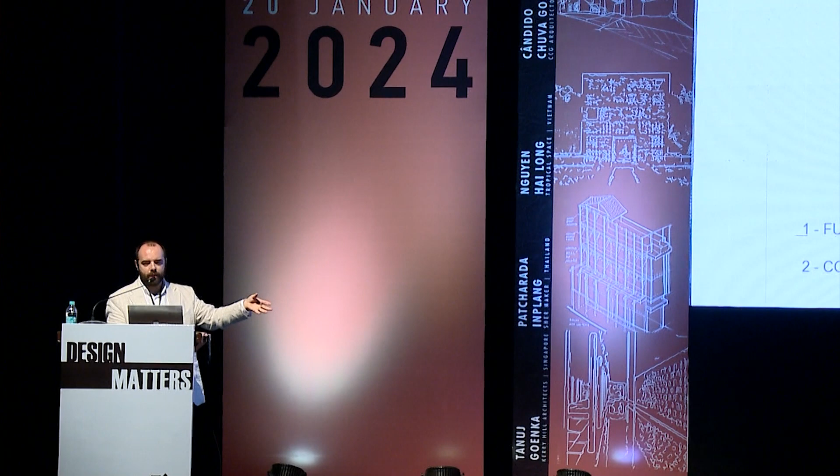Then we have two other aspects, the lighting concepts and the artists, because we think that architecture obviously is going to transform and create spaces for new functions and new people to inhabit them. But we have to gather other artists and other areas of expertise into our practice in order to enhance the potential of our projects.

In this specific work that we developed over the last 40 years, we have a team of lighting designers that work with us, and we have a lot of visual artists, from sculptors to painters, that also work with us. Basically, when we have a project, from the beginning, we also try to find and to understand how we can bring these people with us to explore the projects with us.

So I will now pass to show you some projects. Basically, I will divide this presentation in 4 sections. In each section I will show you basically two types of projects. I will try to be brief on the explanations, but it's important that we divide in these 4 sectors, because they remain basically the 4 major important issues that we have in our practice.

The first sector that I have is single housing. This is one of the photographs of one of the projects, and basically I'm going to present two completely distinct approaches that we had. When we are presented with this type of project, we came across a number of difficulties. So for us to be more certain in how to approach, we have a method of 2 points. The first one is the organization of the home.

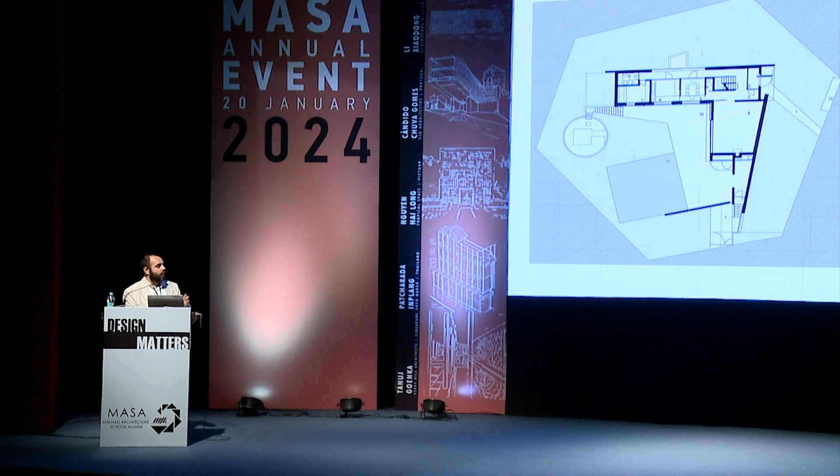This project was near Lisbon, the capital of Portugal. This is a huge plot that was privatized and is a complete forest. It's a pine forest, and inside of that they made a huge allotment, and this is one of the plots that remain there. It has a little bit of a strange shape, but the first thing that we do is to search the concept of a clearing inside of that pine forest.

And then we try to identify what were the most exposed parts of the plot, because in Portugal the northern side is the worst side, because you have cold coming from there, you have wind coming from there, and you don't have any kind of sun, because the sun goes from the east to the west and passes through the south. So in that way we just create two walls to protect the house from those worst places and turn the house to the other side.

Here basically we have the main entrance over there, and then this is the ground floor, where we have a living room, a dining room, a kitchen, obviously the vertical access. You have the pool, which is correlated with an outdoor space, and you have some type of suite, like a guest room for anyone who was invited.

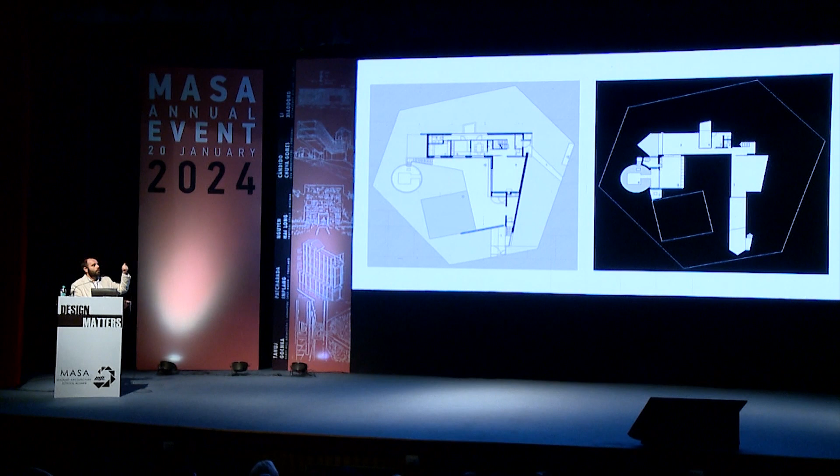On the lower level, we have the parking spots. We have a huge wine cellar, and we also have the master bedroom. This is one of the requests of our client. He wanted the master bedroom on the ground floor, and then we created that circular hole that was represented in the photograph I previously showed. That was like a private patio for him. On the upper floor, we have the other three rooms.

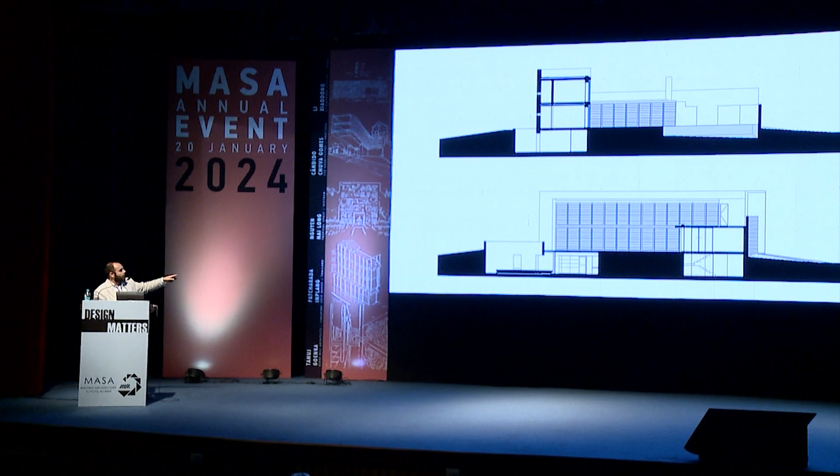This is just to show you the different levels that we have, and on this one, the private patio for the master bedroom, that is totally open. Here, we are going to introduce a new theme that is going to be the materials. So we have the main entrance over there, and we used a huge wood door that was obviously painted in white to correspond with all the wall.

And we use one of the main elements that we utilize in our architecture, that is brick. This brick, like other speakers have said today, is terracotta, which is a handmade, fired brick. And the idea behind this utilization, that is a little bit common in all of our projects, is because it creates a sense of timeless perspective, because the material doesn't need any maintenance, basically, and it evolves with time.

So when it gets old, it changes a little bit the color, it gets more or less affected, but during a long period of time. So the lifespan of this material is very large, and it requires no maintenance. And the fact that it almost changes itself, it gets blended with the nature. So that was one of our main goals.

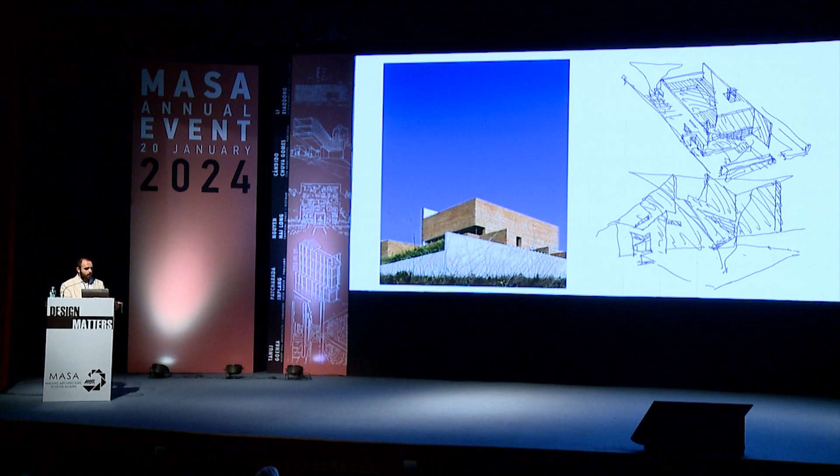In this particular plot, we tried also, since there was no nature there because this was an urban plot, to incorporate at least three trees, because those would somehow organize our project and our house. In terms of structure, the first one that is in front of the building would complement the facade, the principal facade, and it will allow us to create the house around that tree.

The other ones over there have different purposes. So we have basically two ways we can go all around the house. We created this ring, but obviously with some obstacles on the way that need to be surpassed in order to have different points of view, not only on the house, but also to create intimacy for the interior spaces of the house that can utilize that outdoor space.

So that one is to create an end for these main axes that we have here, and create some sort of naturalization of that balcony that we will have over the bay and the ocean. The other one on this side, this is a more private sector, and that tree complements and creates some kind of correspondence throughout the two stories of the house.

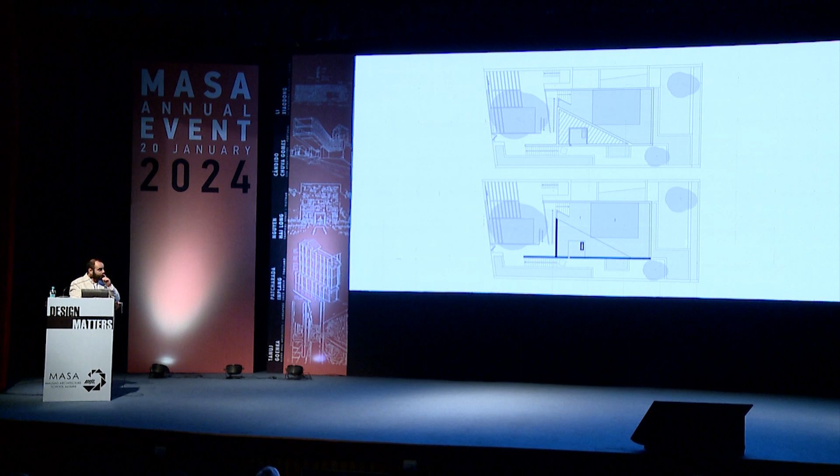When we conceived this project, it was not that common. So we have these outdoor stairs near the entrance of the house, where you can get to the rooftop and you have the pool. The only way to put a pool on this plot was literally this one, because we didn't have space to put it anywhere else.

On the ground level that you enter through here, you have a parking spot, and then when you enter the house through here, you have this whole living room, the dining room and the kitchen with a social bathroom. You also have a balcony directly connected with those social spaces.

On the ground level we have all the private sector. So we have a common living room that could possibly be for the kids, and then we have two rooms, one for each kid, a closet, and then the huge master bedroom.

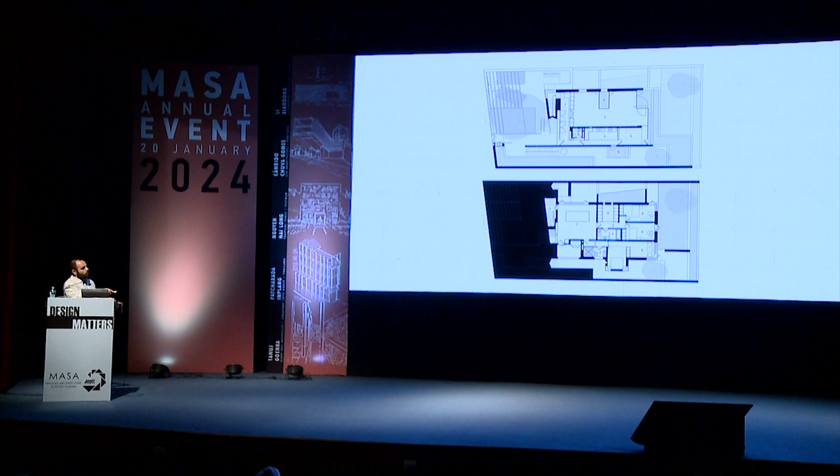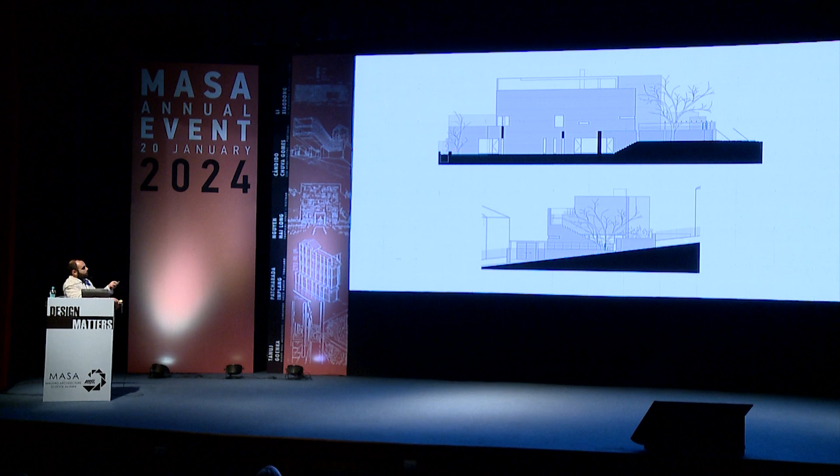Here we can understand, because the plot was on a very high, steep hill, we had to overcome that difficult topography on the same plot. So we had to manage those different situations.

This is the main facade where we entered the plot. Even here we have different altitudes, because we have one entry for the car that is on the same level as the street, but the main pedestrian entry is on the right side of the plot.

In the living room, we also try to pass that idea of the labyrinth into the inside. So we created these diversions in order to not expose the house excessively to the south and to the sun, but to create some little outdoor spaces that could help divide the living room into different kinds of organizations.

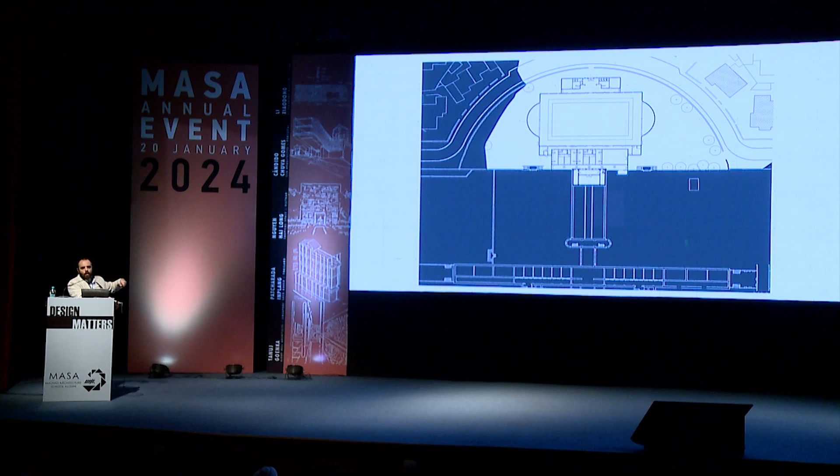This is our project. We tried to maintain what was there, to identify the specific areas and what was good to preserve and what wasn't good to preserve.

We had to excavate and allocate on the ground levels the laboratories on one side and on the other. All of the school classrooms are located over here, with a new expansion.

This is a connection that we made to the new pavilion, where we left all the structure intact, but changed some of the finishes and some of the outdoor lining of the building. This one also changed its function.

This is the new corridor that we made, allowing all of the students to go, even when it rains or it's cold, beneath the previous building and access the sports pavilion, where we also created some new locker rooms and some new areas for them to hang out.

This was the old entry, which has a bit of a curiosity, because at that time, the schools in Portugal were divided by girls and boys, so you don't mix them up. One wing was for the girls and another wing was for the boys.

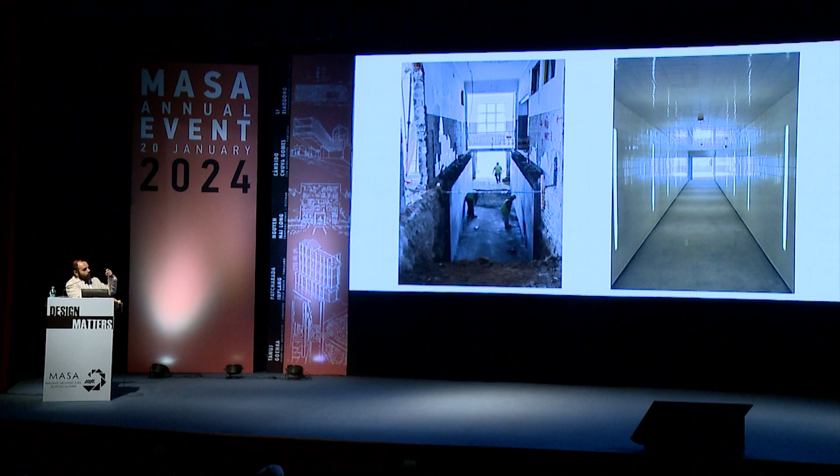This is the new corridor that we made to access the sports pavilion. This is during the construction, and the old pavilion where they practiced athletics was literally within these three walls. So it was very small, and we demolished the slab. We created a ground space, and then we created a tunnel that will allow the kids to access the space.

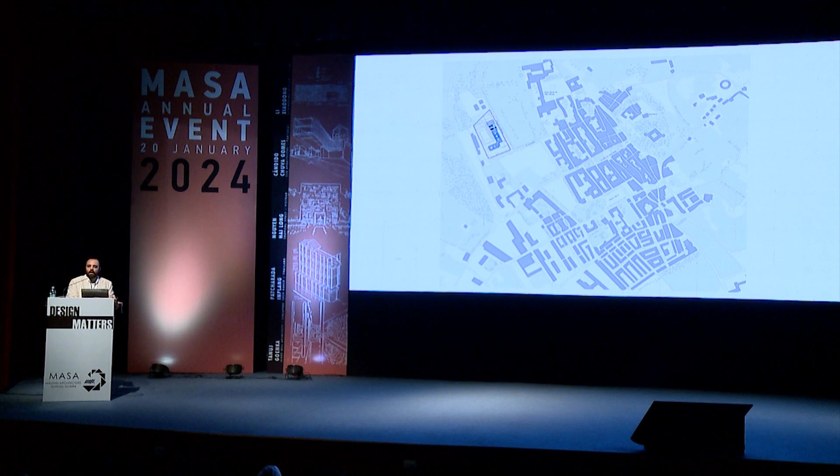So the village is very small, obviously, and it has a lot of green spaces because it is a rural area. So we were very concerned about 3 or 4 trees, but the school's direction was not. They said that they have a lot of green spaces, so we can demolish and do whatever we want. But we thought it was interesting to maintain those species there. So these images show the 3 pavilions that we maintained and the new additions that we have.

We thought about this approach because of maintenance and management. When you have dispersed pavilions, you need multiple teams, because it's more difficult to know if the students go to the classes or not, or if they are doing something they are not supposed to do, or even to control if they checked in to the school or not. And keeping it clean and running smoothly was much more difficult like that.

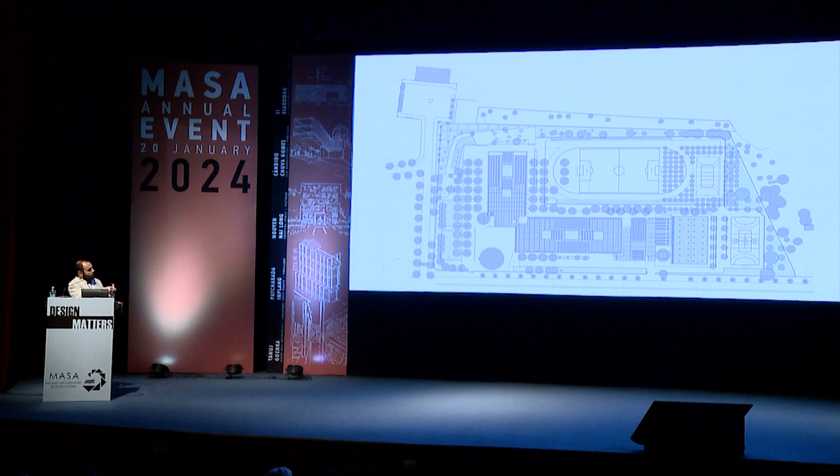Obviously, we planted more trees and more greenery outside with the landscape arrangement. But the most important thing to show here is, besides the entry with the reception, this is the sports pavilion that we maintained, that was already there. We expanded it into a new sports pavilion, and then we put in some new fields for them to play athletics, sports, everything they needed. And this is the new part in the new buildings.

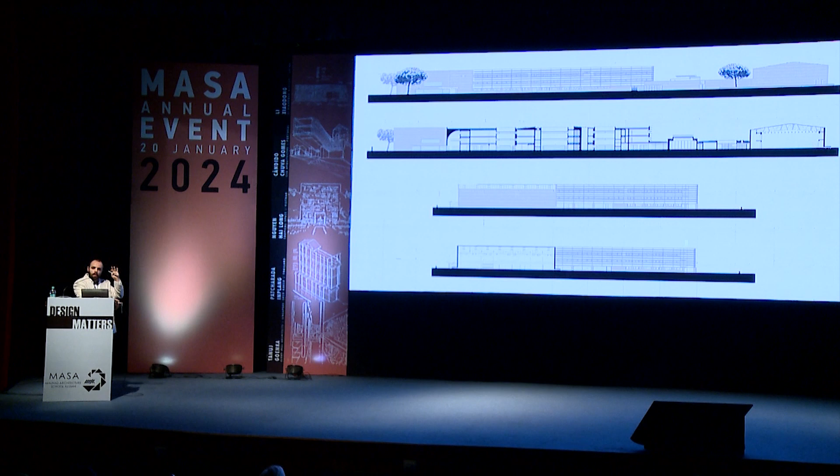The important thing to show here is that entry, because we made a curved ceiling that has a 3-story height. So this basically helps to absorb the building horizontally and vertically with this triple-height ceiling. And this creates a new hallway that helps to dignify and create a kind of unity in all of the school.

Once again, the brick was our chosen material for this project. We basically had in here two materials. We don't like to explore a lot of materials in one project, because we think that creates some more dispersion; this helps to unify and consolidate all of the unity. In this case, we chose it for the same motives that we chose it on the other projects, due to its maintenance and durability. The lifespan of terracotta is huge, so it was our chosen material.

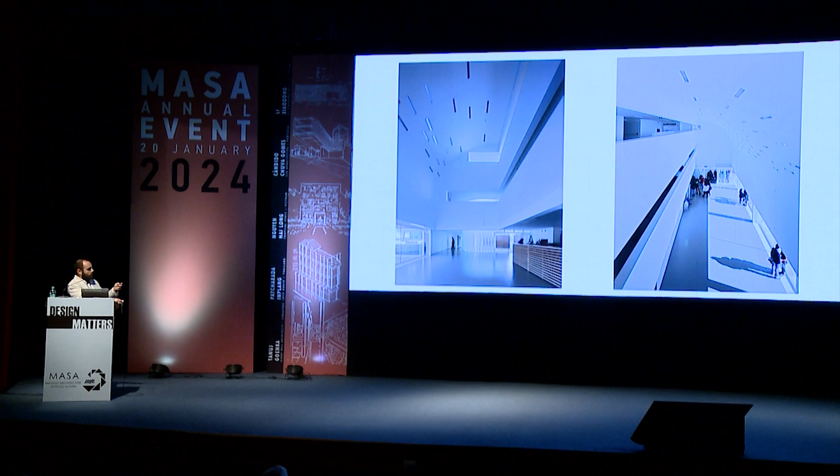What we thought was to close the patio, open the skylight, and create new social areas. The one on the right is directly connected to the bar and to the eating part of the school, and the one on the left is connected to the hallways of some classrooms. So the students can, during break, when it's hot during summer, go there, and it's absolutely fresh, and it's very good to be there.

This is that joint that we resolved in this way. We created this opaque glass. We utilized it in order to push the light in, because since it was in an inside corner, it would be very dark, but it has a lot of corridors on the inside, so we needed to have light coming in.

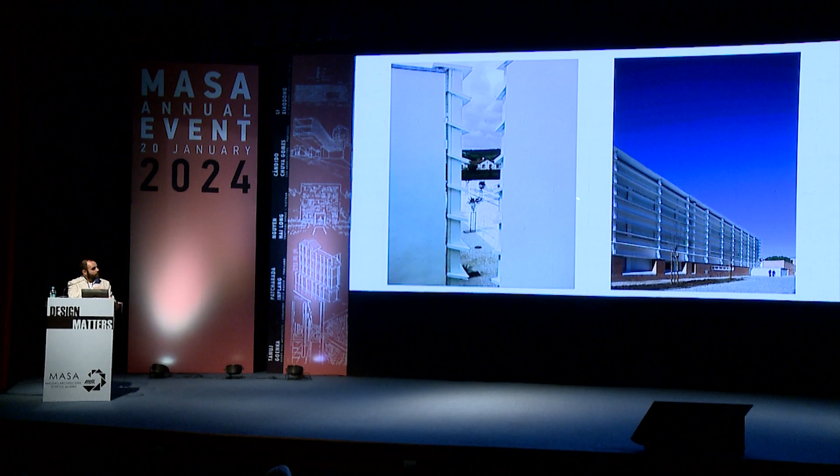We utilized it for two different reasons. One of them is sun protection. Since they are inclined down, when the sun hits the facade, they automatically and permanently create a shadow on the inside. Especially in the summer, or three quarters of the year, they have a huge sun there, so they needed these kinds of protections. The second part was to provide unity to all of the school. On one side, you have the bricks that on some parts of the school take on all of the building, then they keep only to the ground floor, and every part of the classrooms gets this GRC.

This is an example of the incorporation that we have made with the trees that were local. This one was not planted by us. These were the existing ones, and we tried to adjust our architecture around this nature.

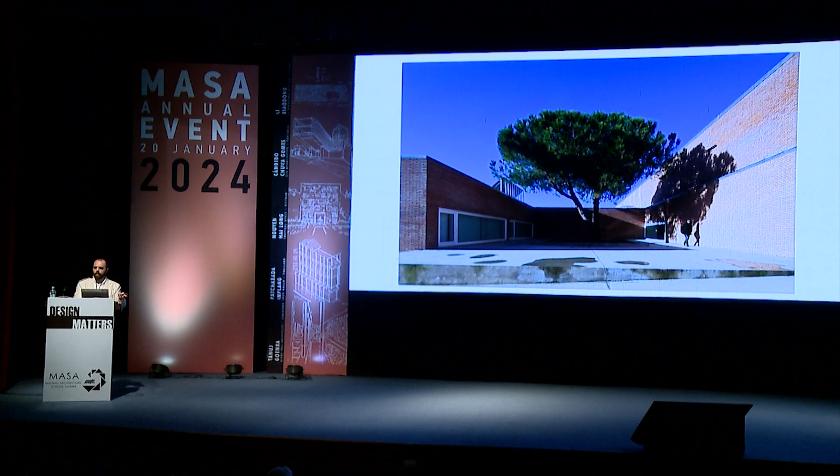This image, I think, is a showcase of the unifying that we did, because when you look at it, even if you see this L shape, you almost don't understand that it was previously three predecessor pavilions, and now you have one whole building. So that was one of the main ideas to utilize the GRC.

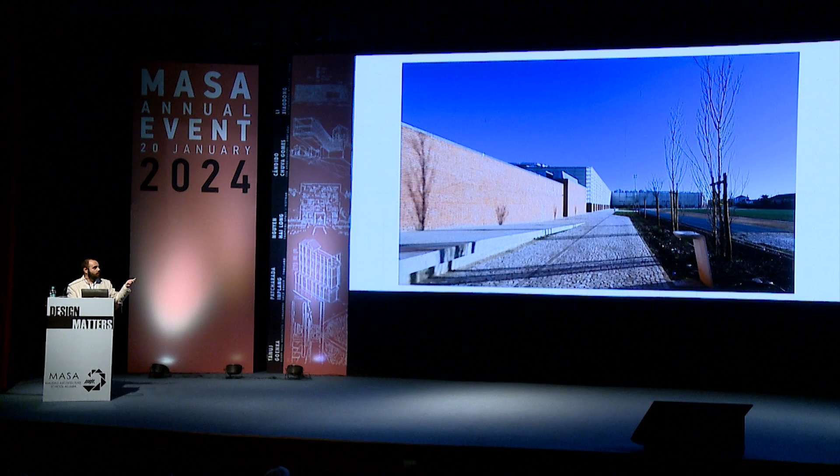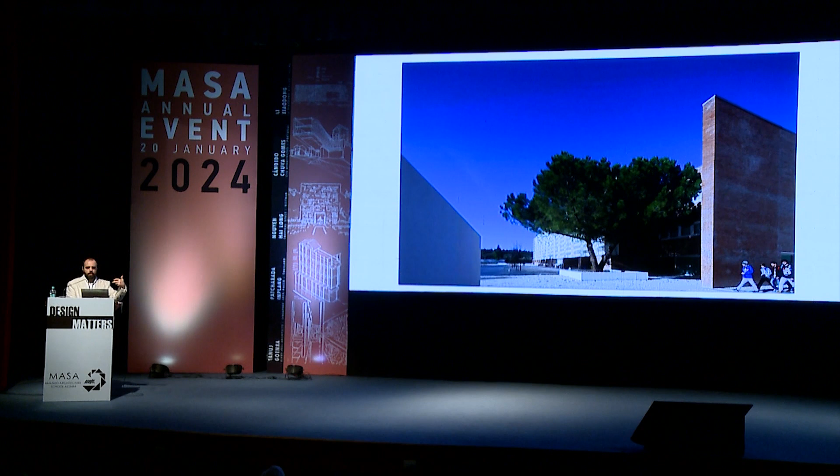This was the other tree that was kept there. It was very bright and very big, so it was important for us, especially. And we adjusted the architecture so much to it that on the ground level, right here, we have the library. It was specifically put there because the tree could create some sort of shadow for the library, so that the sun doesn't get on the inside. You can see the entrance over there, and then the library on this side, protected by the tree.

So the third section that I would like to present is museums. We've had and have a lot of experience in museums, and this type of project is always interesting because they are always different.

We have made like 10 museums, and the 10 of them were all different because all of them are for different things. They have different heritage, they have different backgrounds. So it's always a good challenge. In this particular section, I will show you. This one is a museum of a city hall, okay, of a region. So it was to showcase the history of a region.

On the second one that I will show you, it's a work museum from the industrial era. It has a lot of layers, a lot of history, but all on the industrial side, on the working side. This particular building was a noble house, was full of additions, full of alterations.

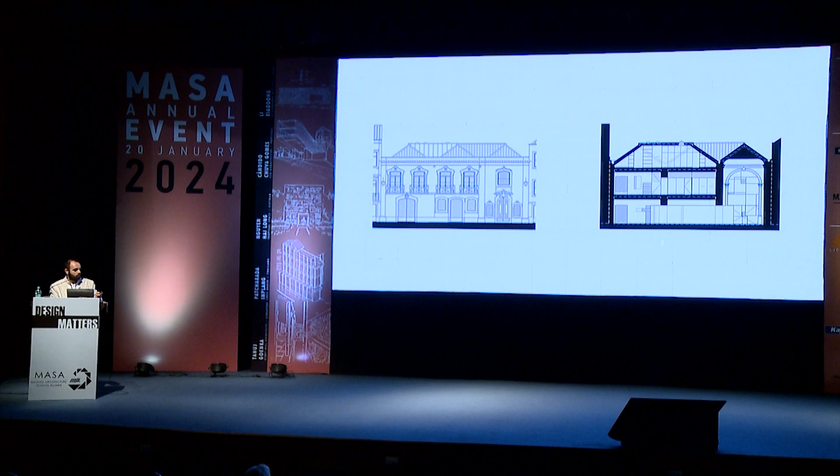Here is just to show you how it was closed. Basically, it had a slab over here, and obviously we removed it to return it to the original state. On the expansion side, we had basically this courtyard made in a structure of steel frame and glass.

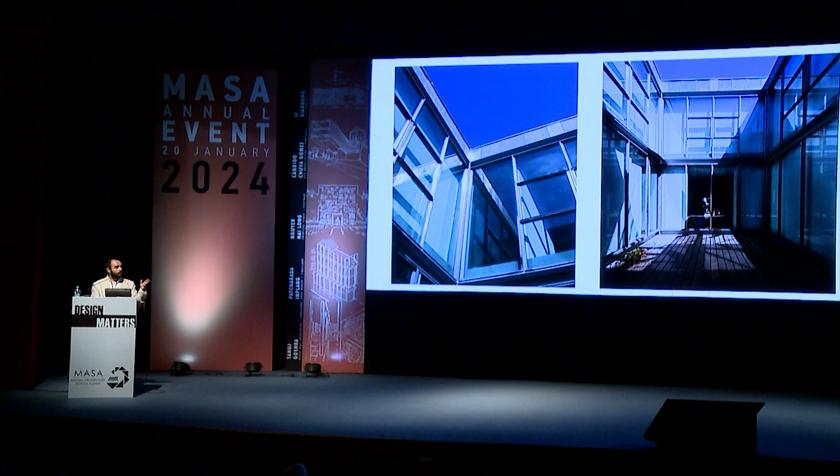The important thing that we did in here was, since we had a noble house and then we had to demolish everything and create this new expansion, we wanted to have two constructive and two material worlds colliding. So on one side you had the masonry, the bricks, the painted walls, and on the other side you had this metal and more industrial kind of construction, in order for them to dialogue together. This is the main nave of the church.

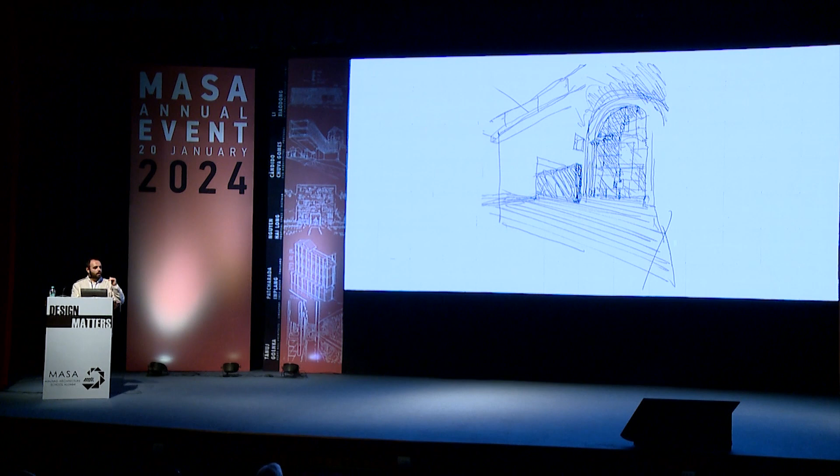And once again, we have called an artist friend to help us consolidate our idea and integrate it into our project. Basically, what we projected was a screen with metal and wooden structure divided in 48 different panels. This was our first concept, and what we thought is that with the disappearance of the chancel, because originally here it had the altar and the place on the back of the altar where the father used to go and have all this stuff.

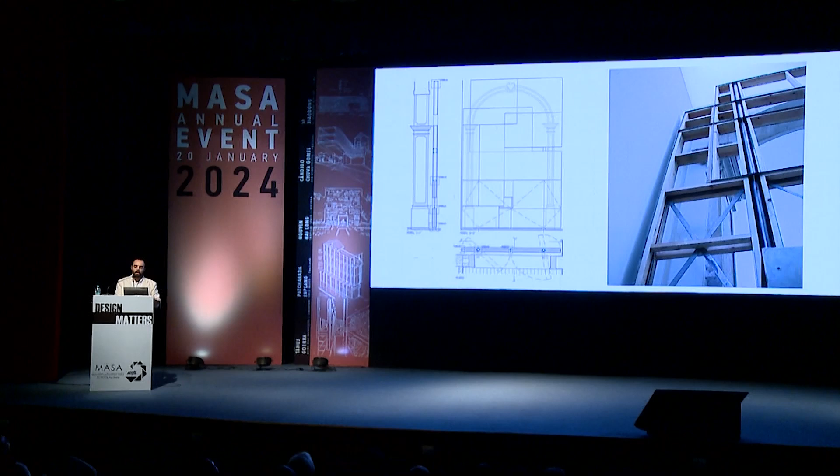With the disappearance of that, we thought that we could create this wood door that is a second entry from the original building to the expansion building and to the exhibition part of the building, and create some sort of symbolism of the destruction of the chancel. These are the details of the construction. Like I was saying, it was metal with wooden frames, and it had a screen on each of the 48 panels that make the design of the composition.

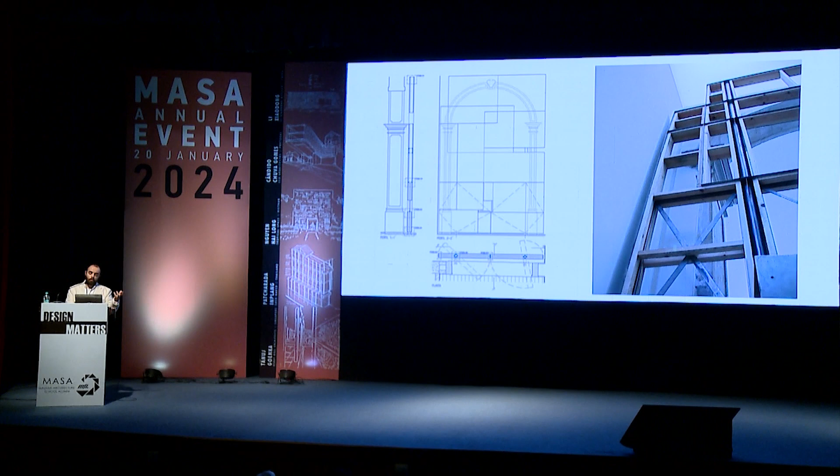We told our painter friend the theme that we wanted him to paint, and then he painted it. Basically, on the side facing the nave of the chapel, that is this one, the illustration represented the sacred. On the other side, facing the new expansion of the museum, the illustrations represent the profane. So we basically wanted to create this dichotomy inside of one wooden portal that represents the difference between the sacred and the profane.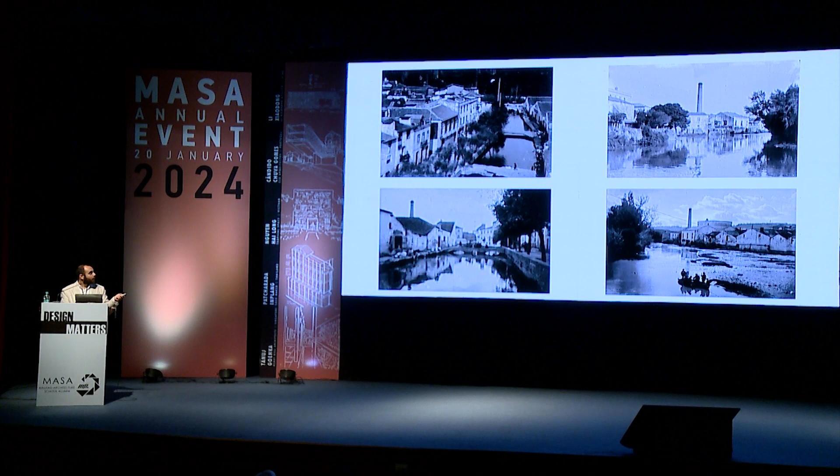This was together and created here because you have a river on both sides. First, to utilize the river and the current to create energy, because it allows it to move the mill, and only with the force of the water running by, it would grind all the cereal. That's the first one. The second one was it allowed the boats to get there to charge them with the cereal, and then export it to other parts of the country, and even of the planet.

This is actually the architectural survey that we did on the entire complex. Basically, all of this was industrial. All of these parts have a lot of industrial background. This had a system of blockage of water, because it had 3 channels down here, and it had a system that blocked the passage of the water. This was an electric central, obviously not done by the monks, but it evolved over time.

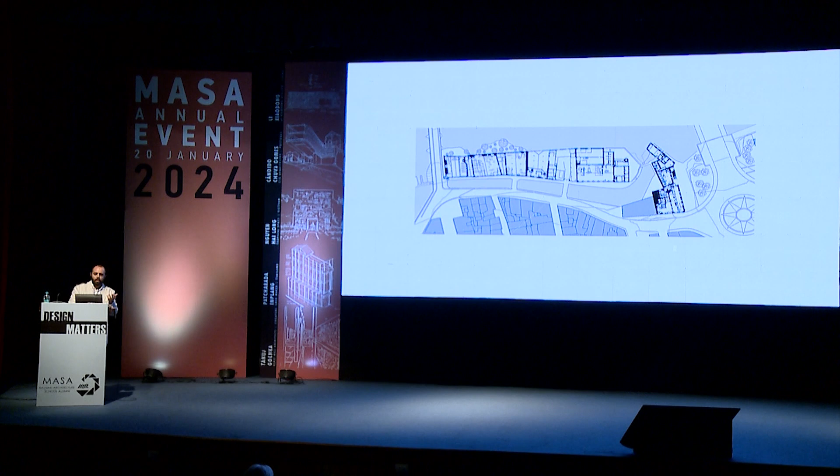This was the first building that was made by the monks, the first mill, but all of this complex on the right side is all for grinding cereal from 3 different timelines. The first one built by the monks is this one, that was completely functioned by the water. Then they created a second one that initially was functional through the water, and then they stopped that and they mechanized it. And then they created a third building, this one, that is fully industrialized. That's a more recent one.

The importance that we've seen in the architectural survey is that we had a lot of eras and a lot of industrial heritage background. So we needed to understand very deeply what was inside. And our intervention basically covered 3 aspects. One of them was the musealization of some of the activities that were developed there. So they remained almost untouched, and we just cleaned a little bit, put some passages, obviously tried to recover and restore everything that was damaged, but tried to leave it as it was.

The second part was the recovery of some of the other buildings, but adapted to new functions like reception, documentation centers, administrative areas, exposition places, amongst others. Those were the buildings that didn't have anything particularly interesting on the inside, or that we could give a new function. So they were renovated in order to give them a new function.

And the third aspect was the outdoor space. The outdoor space was very important in order to create new leisure zones and new staying zones for the people that come to visit, because the overall idea was to showcase the importance of the entire complex and create this interpretative museum, so that the people that came here could understand how the industrial process was made in that building, and see some expositions of the times that it was made.

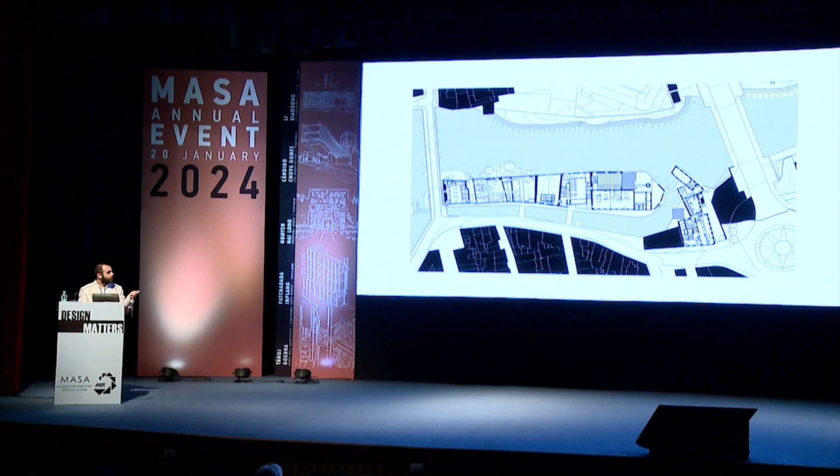This is the outdoor space along with this building, and these are all the ancient grinding mills, where we musealized them and kept them as they were, except for this one that was too small to have any function, so we left it for multi-purpose rooms. This is the first building. Basically, it was like this.

And then we transformed it into these administrative areas. This is a bit of a showcase of industrial architecture, because we have faced multiple types of constructive systems, and we had to study a lot, and the history too of the place and how the construction was made, because we tried to maintain all of the possible structure. So we had to try to understand how we could intervene without destroying the ancient structure that was already there.

This is the industrial part that we have musealized. Basically, the structure is maintained there, but we needed to add some supports and some new structures.

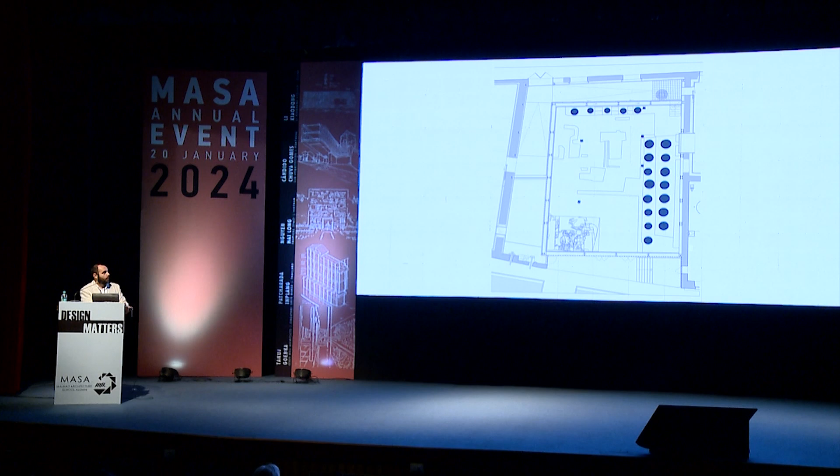You can see the inside, and you can see basically the mill as it was. And then you pass to the other building, continuing the exposition. Basically, we put these shades, these skylights, in this direction because they create some indirect light on the inside, so it allows you to have a full perspective. Since you had light, you had a good perspective of all without any shades.

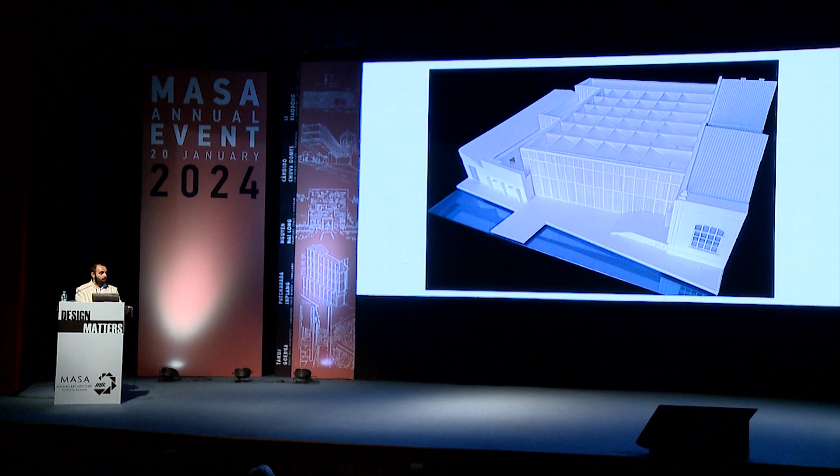This is the documentation building and the part of the expositions, like a multi-purpose room where you can do conferences, you can do expositions and everything that you need. This is the electric center.

It was basically like this, so it was preserved under a very thin rooftop, and we managed to keep the structure, changed the rooftop, and created just some new supports, and obviously musealized everything.

This was the first building, the one that was constructed by the monks, and they had the water passing on the downside of the building, that could move all the grinders for the cereal.

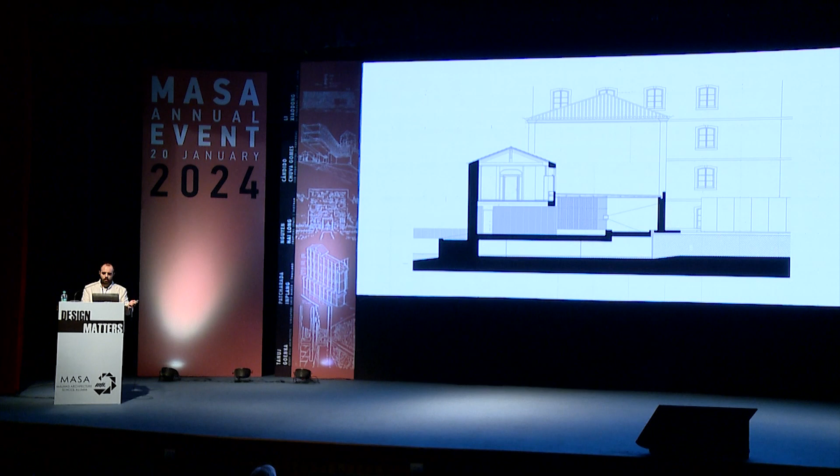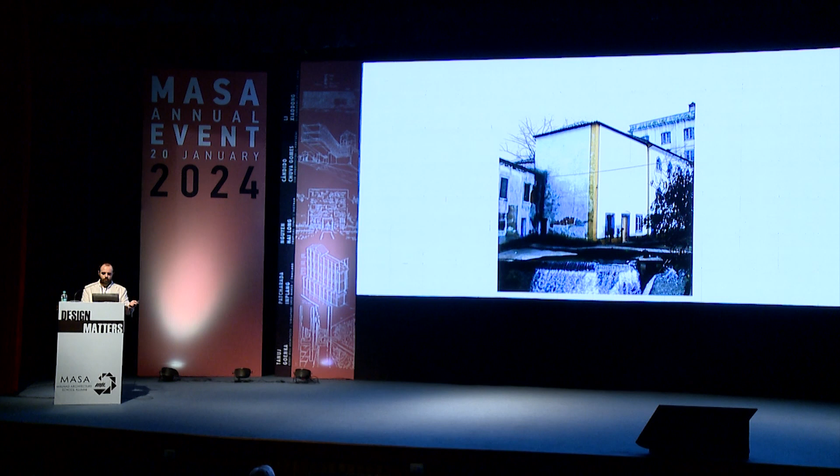This is the second building, the one that started with the same technology, but soon after they turned it into a mechanical part. So here it's already changed for the mechanical, and we also turned it into a museum.

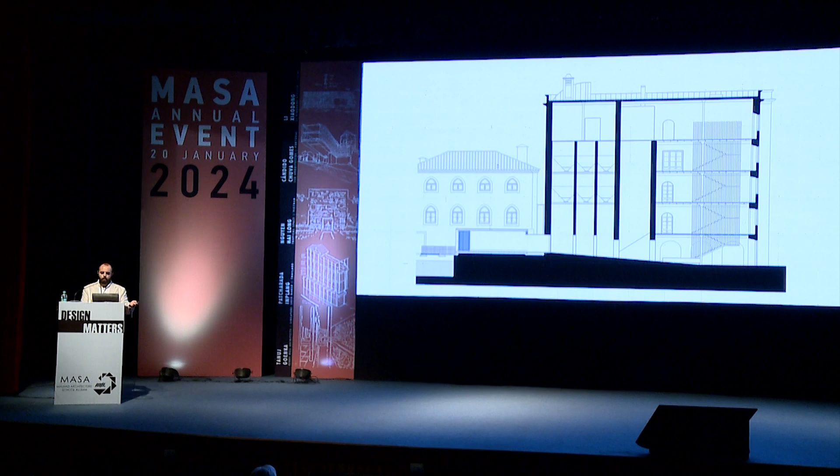This is the third building, the largest one and the most recent one, that is fully industrialized and obviously fully mechanical. This is the complex of the three grinding industrial buildings. And this is a view of all the complex, including this. And here we can see the two outdoor spaces that we tried to create. So this one, with this rooftop near the industrial chimney, and the other one on the left.

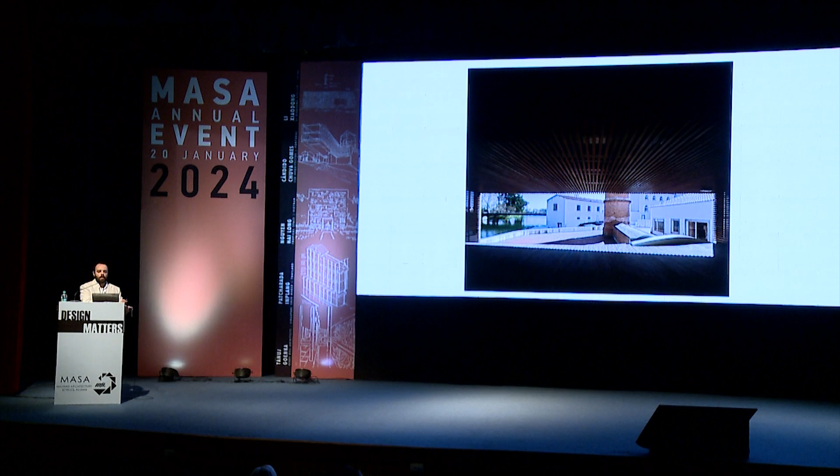Basically, we have done the same thing for both of them. We took some wood material, we covered them up, and it created huge outdoor spaces, where actually there were already some conferences, some lectures there, some teachers also brought their kids there. They had a full experience of all the complex, and then they stayed there to get some lectures.

This is the second public space that's on the other side. Basically we have created these two points because they allow you to have, from one and from the other, the total view of all the complex. In one of them you are on the right and you see the grinding buildings, and in this one you see the entire complex, and obviously with the river in front, which is this one.

Okay, the last section that I bring, I'll try to speed up a little bit, I'm sorry. The last section is a heritage section. In Portugal, we have a lot of heritage buildings, a lot of ancient buildings there.

In this particular case, the first one I'm going to show is the rehabilitation of a castle that we were commissioned with, and on the second part, the renovation of a convent.

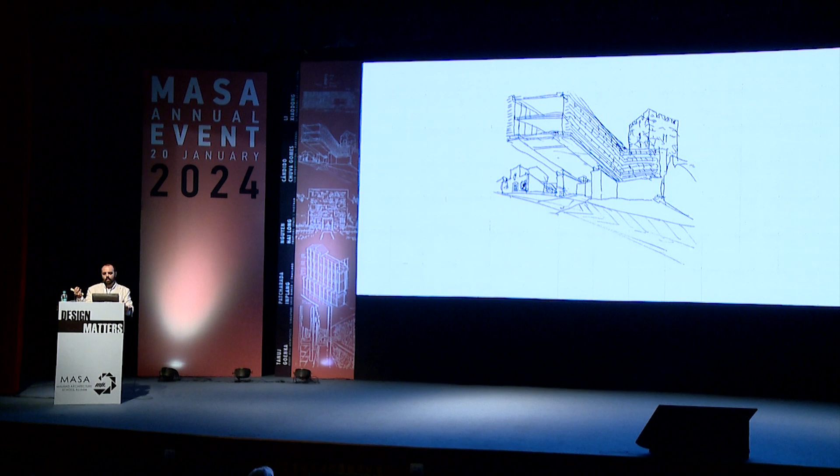So we tried to resume the original matter and find a form of unifying the tower with the core of the castle. Basically, you can see it here. So it was connected here, it had two walls, and then they were demolished to create this street. So we tried to unify it again. This is the core of the castle.

Once again, we started the archaeological and architecture surveys, and all of the heritage popped up. So we thought about doing a wooden structure.

Since it has a lot of archaeological history and background there, with the choosing of the wood we tried to achieve basically two things. The first is to guarantee the first rule of any intervention in heritage, which is reversibility. So you can get there, pick up everything that you've done, take it out, and leave everything intact as if you had never touched it.

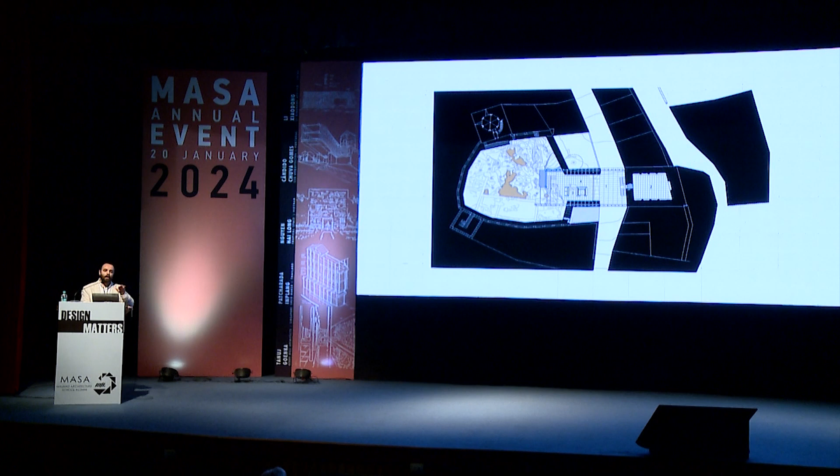The second part is, since wood is a natural element, it will oxidate over time and turn gray. So when it turns gray, it will kind of unify itself with the wall, with the stone walls. The idea was that when someone looks at the castle 50 years from now, 100 years from now, whatever it was, it will all be gray. So it would not be seen as a new addition, but as a natural element that could always have been there.

This is the ground floor that we had. Basically, the idea is the castle was always meant not only for security measures, but also to gather people.

When you had some attack on your village, everyone would gather at the castle. So we tried to bring people back to the castle and promote it as a public equipment. We created an interpretative center there so that the young people and everyone could go there and see how important a historical landmark it was for them.

The ground level has that part, the underground level has that part. The ground level has the cafeteria, and also has this huge zone that could be used for expositions, concerts, and other social activities.

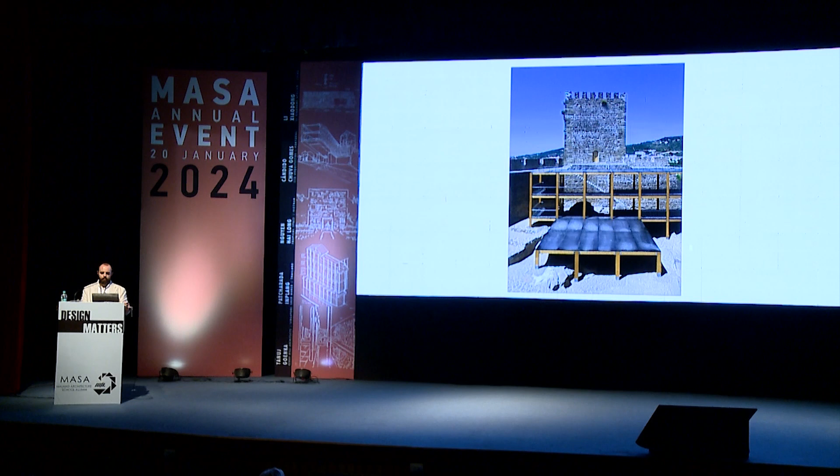This is that outdoor zone for the concerts.

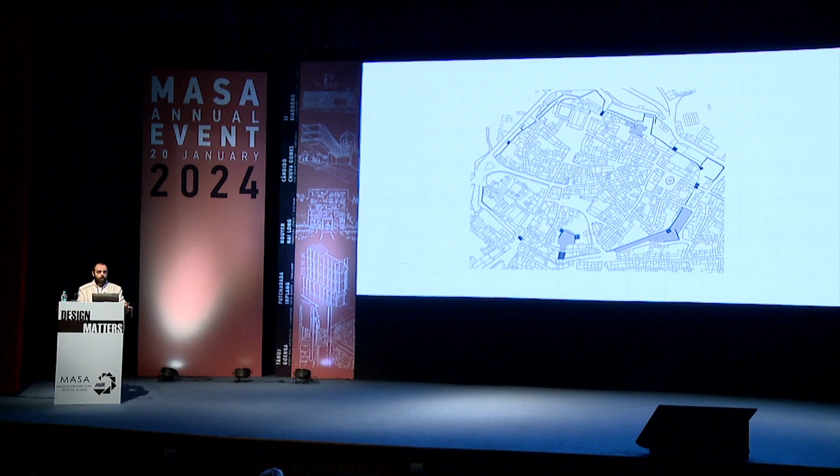Now we entered the Barbican. Basically, the Barbican had already been intervened, and some of the walls, like this one, were very recent, so they were not original. They were built for security measures because it's a short space. So we demolished them in order to keep only the antique wall.

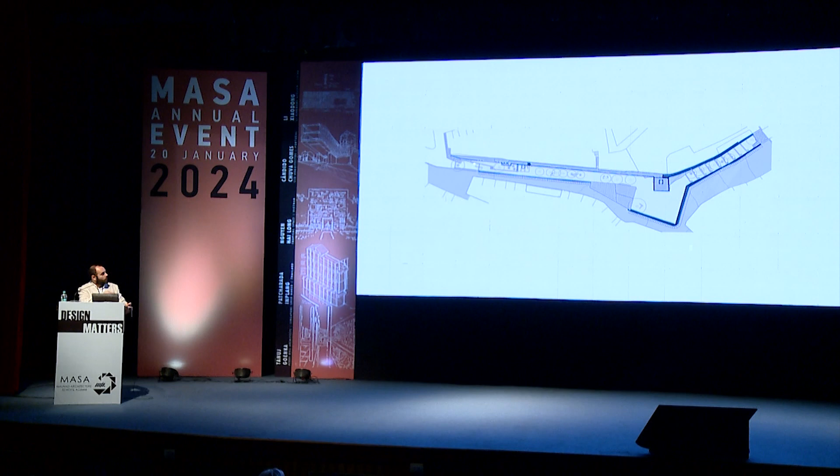This was the state as we found it. Basically, we have kept all the vegetal structure that is here. All of the trees, we left them as they were, and we created two doors, one on each side. This is on one of the sides. All of these stones are local stones, like this huge floor where you excavate a little bit and you have massive granite there.

So we utilized it on our project. Then again, our lighting designers worked on this. These trees were on different levels because it was a very shaped hill, so we created these different plateaus to put them exactly according to what level the tree was at.

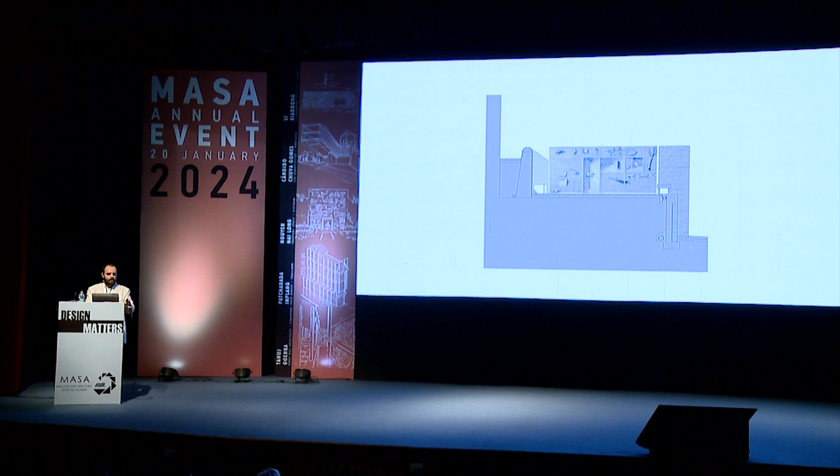On the other side, we called another friend of ours, an architect and sculptor, the one who made the sculpture on that first single house that we did. Basically, the idea was to create a public landmark. We could create any kind of portal, wall, or door, anything that we wanted, but basically we wanted to create a landmark and public art. In this case, we designed and sketched this, and he turned it into reality.

This is basically a metal door that has these shaped stones engraved in it.

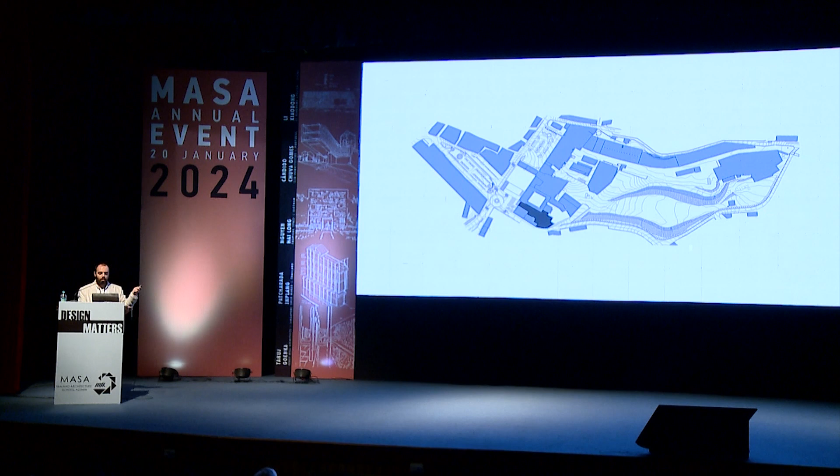The last project that I have is the rehabilitation of the convent. Basically, we already had experience here renovating a lot of religious elements. This one was founded in the 13th century. It had undergone a lot of changes throughout time. The degradation was huge, and very little remained from the original times. It's located over here near a quarter. A fun fact is that this is in the exact same town as the castle, a village in a rural, interior area of Portugal.

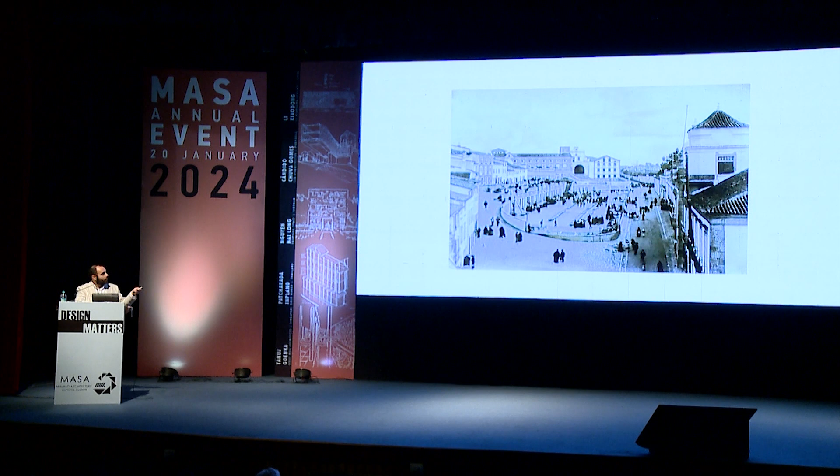This was the outdoor, so it was completely closed to the community. Once again, when we started to do all of the architectural and archaeological surveys, we came across this element, an ancient wall, and some other ancient walls. There were even dead people there, like skulls. Basically, we had to dig everything up, catalog everything, and put it in our project.

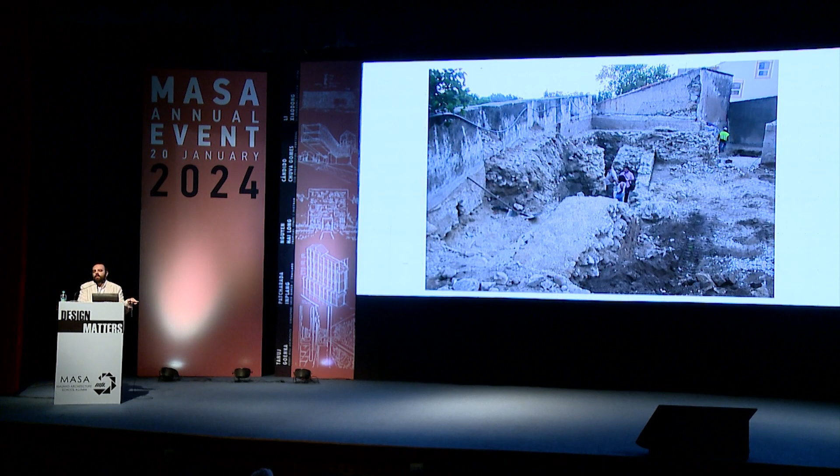In this particular case, for instance, we had this wall that was in very good shape with ancient inscriptions in it, so we couldn't demolish it - we had to integrate it into our project.

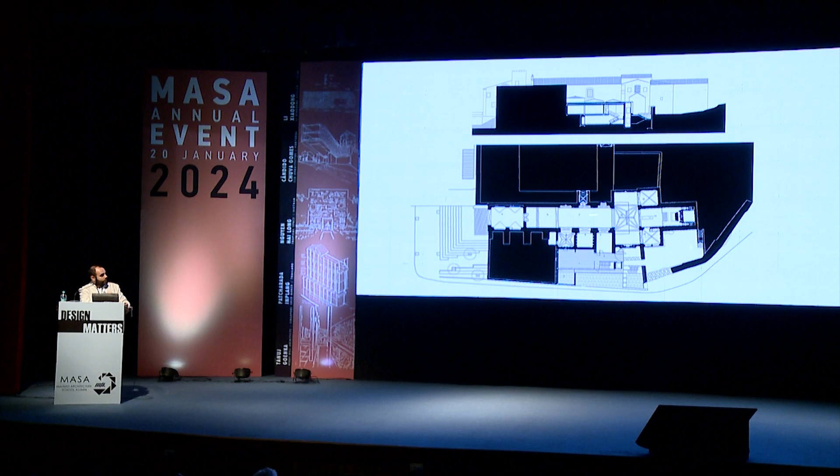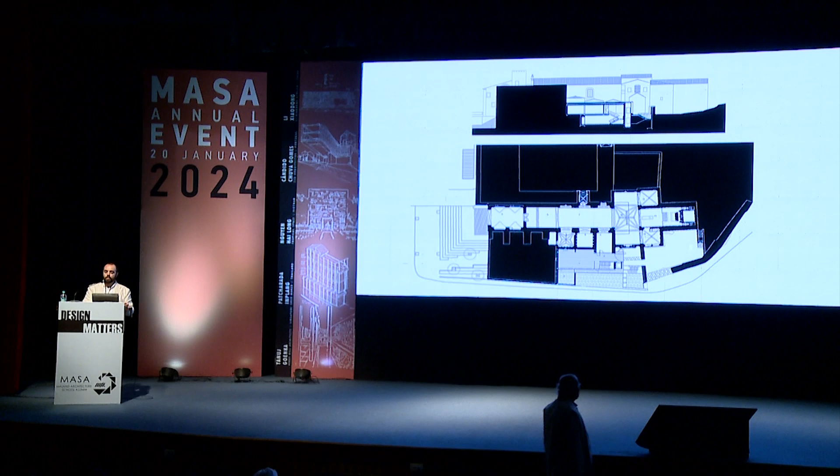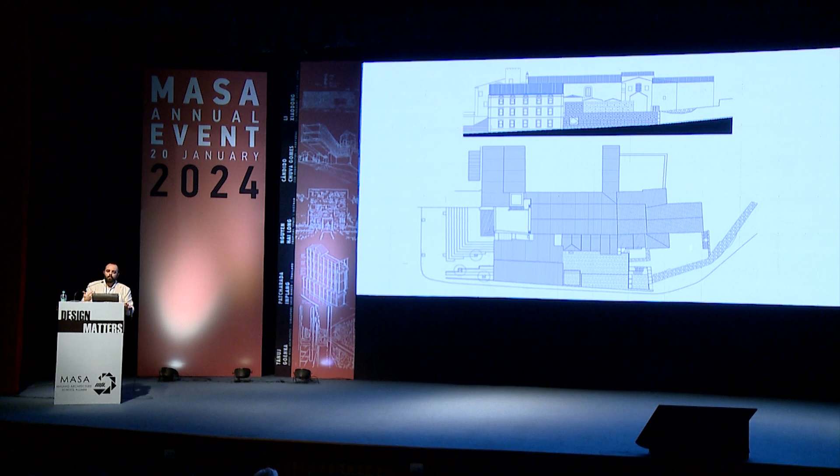This is the main part of the chapel that we have renovated, and this is an expansion that has an interpretative center and an exposition for religious art. On the ground level, it's the expansion of that. This is the new facade that we put up for the street in order to open up for the expansion part. These are some images of how we renovated the space.

This project was very hard to do because it had a lot of elements - gold tiles, basic tiles, wood, marbles, stones, a lot of things that were here. We had to gather a very complex team in order to achieve this final restoration.